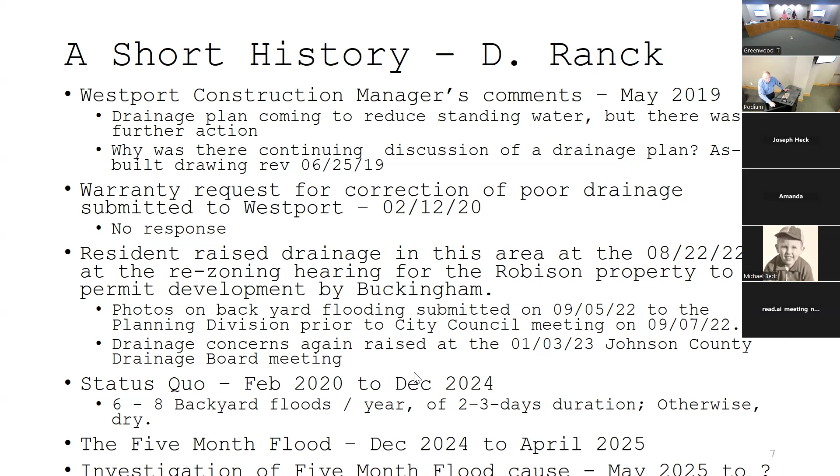The drainage plan - the water we're talking about comes from 2 on-site post basins, 4A and 4C. One of which is the pond - the detention pond releases by 30-inch storm sewers, and runoff drains to the south, then east into the existing grass channel. The existing grass channel is the Robison swale on the Robison property. The other drainage basin was essentially a direct discharge from the residential lots into that grass channel.

The approved plan was to intentionally release stormwater unconstrained from the pond number 4 control structure directly to residential properties, not to a purpose-designed stormwater channel.

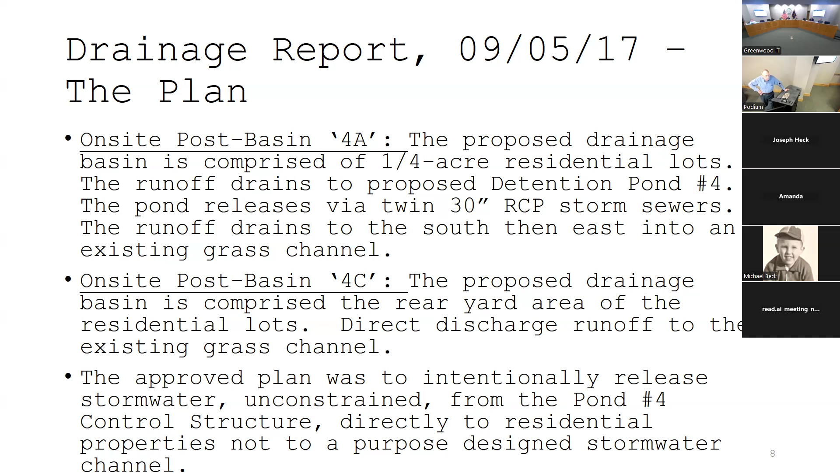Now this is what the plan looked like. We have the 30-inch diameter RCP outlets at the very top of the picture. The red line is where that water goes - it runs across 4 or 5 backyards before it finds its way to the stormwater channel. The green arrows are direct runoff, and it was supposed to go directly to the channel. That was the plan, but this is reality.

Who developed that plan? That plan was developed by Project Plus. It was laid out, and it's their drainage report that this information is taken from.

So I don't mean to interrupt you, but you just said that Joe Heck with Project Plus said he didn't know why it was done that way, even though his company developed the plan. No, he didn't know why we were having these problems when we shouldn't be having them. He said, well, we approved water - like he just said, it should be flowing outward from each house. But he said, I don't know why water is getting stuck at your guys' houses for weeks. And he said he's going to come out there, but every time I go there... okay, I'm going home. So I'm sorry, Dale, I didn't mean to interrupt you. Go ahead. No, that's fine. Trust me, I've done enough NASA design reviews that interruptions are not an issue.

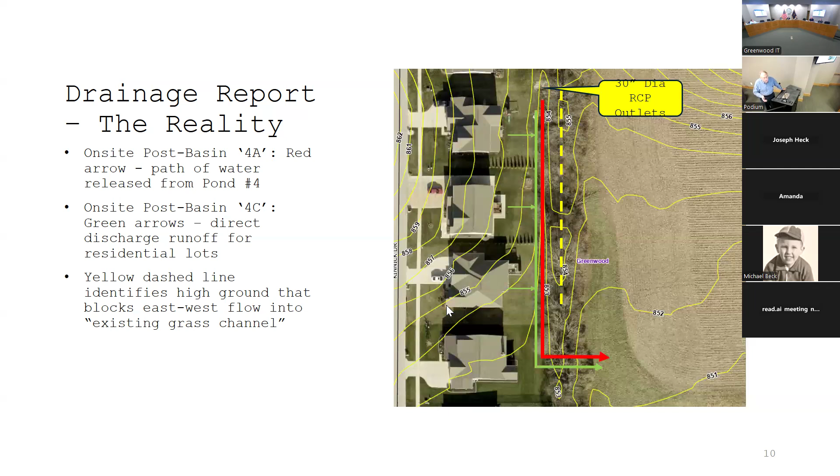Now, the design was the normal pond elevation is 853.7 feet above sea level. There's a 6-inch round orifice in the control structure designed to release any water above that level. Farther up, there's a 24 by 40 inch orifice in the control structure. It releases any water where the pond level is above 854.5 feet - for those of you doing the math, that's 9.6 inches. So you have two stages of water release from that detention pond.

The last one, the 24 by 40, is what causes the conditions that result in a high flow and floods backyards.

Now, this is what low flow looks like. That's kind of the level that you get. That runs from 4 to 7 days after a rainfall between a half and an inch.

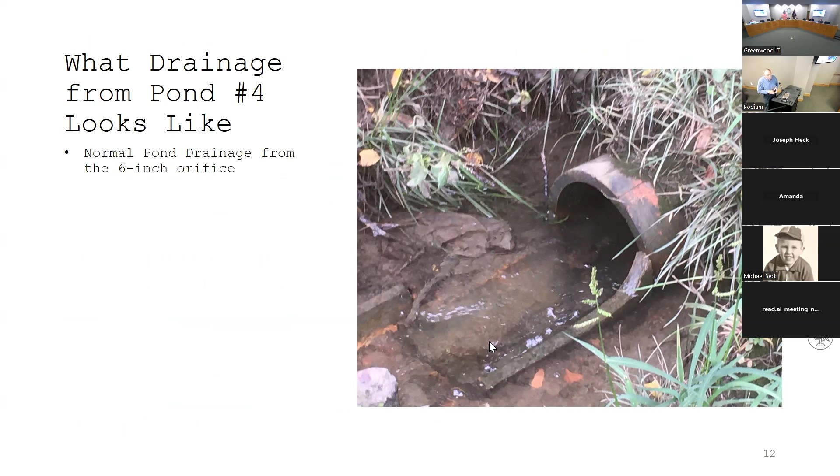This is what high flow looks like. That was taken off of my deck on the back of my house, by the way. And this predates the work that was done to install the pipes and things like that. So the area behind that second deck down there is where the fill and everything is today.

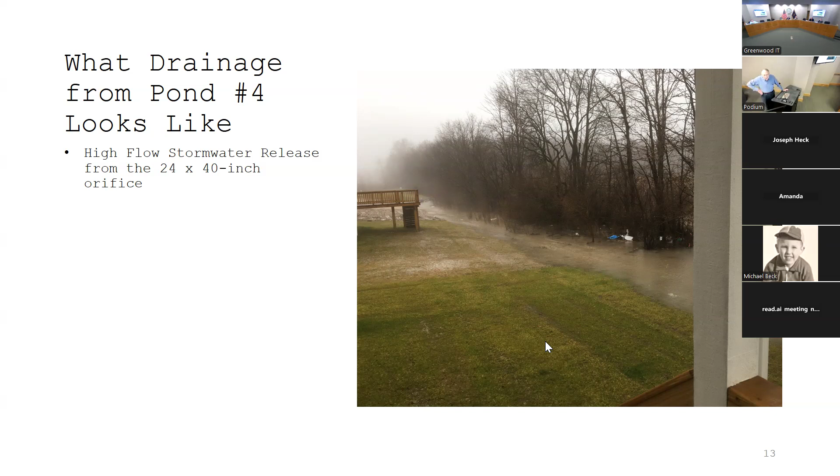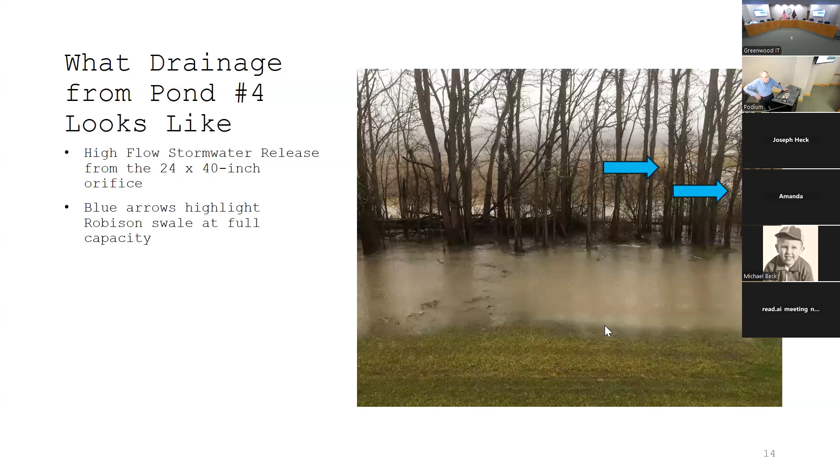This is a second picture of it. That's the high flow stormwater release source. The blue arrows show the drainage swale on the Robison property completely flooded, completely full. That's the magnitude of water we're dealing with. Plus, it also collects water draining from the Robison property as well. So it's kind of a massive amount of water in a big rainstorm. It'll happen.

The flood first appeared in December of 2024. We had a heavy rain, kind of the typical flood. Then it froze and stayed that way well into February. Then it started thawing out, but it didn't drain away as I was expecting, but stayed there until about mid-April.

Now, occasionally having water flowing across my backyard, I didn't really think that was much. As I said, it's not much of a nuisance. This is a nuisance.

And how long is that, Dave? Those low flows -- Greenwood gets between 44 and 45 inches of rain per year on average. On average, it rains 120 days out of the year, so you get measurable precipitation. So basically, we would see something like, on average, 3/4 of an inch of rain a week, which is more than enough to keep that low volume flow going. And it takes 4 to 7 days for that low flow to completely exit and stop from the detention pond. As a result, these residential properties would see a near continuous flow of water across their property. It's hard to call that anything but a nuisance.

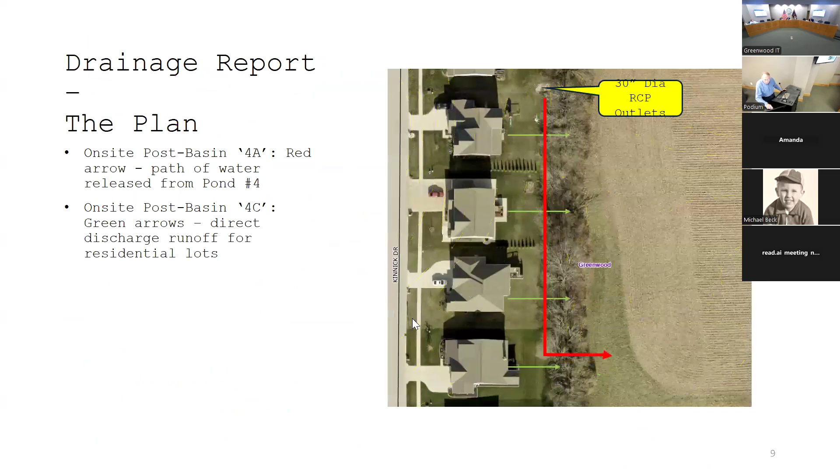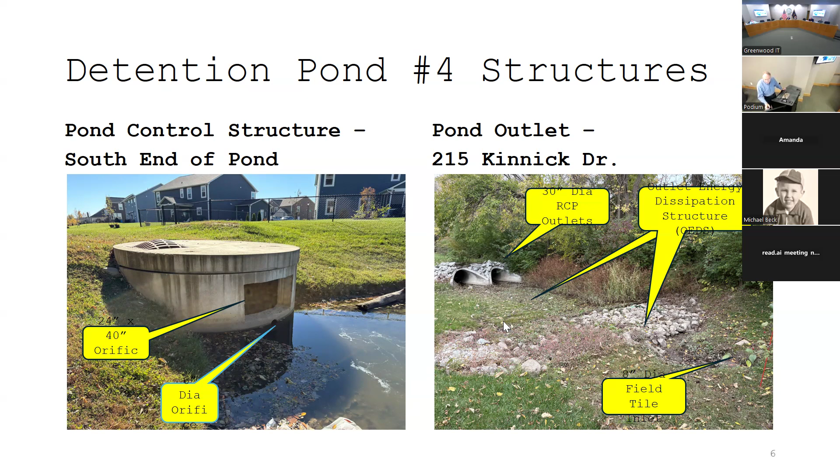And the only reason we don't have that running water is because right now, that water that comes out goes into that tile and ends up over in the Robison drainage swale. If that tile was not there, we would be having running water across those residential lots most of the time.

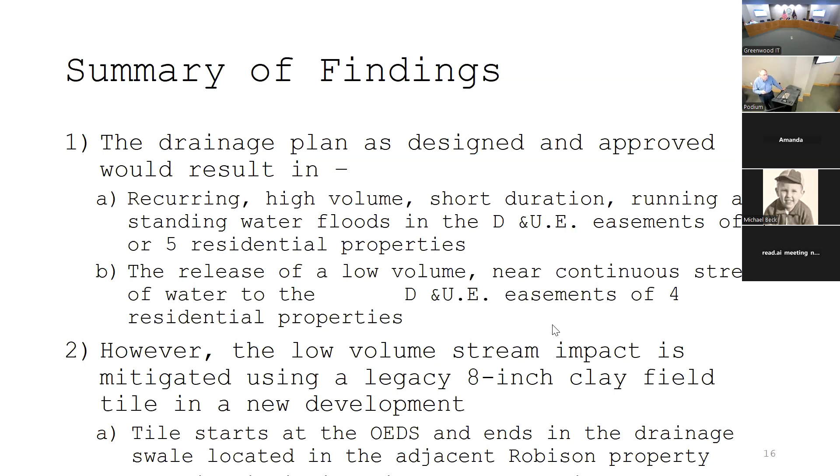There's also an apparent discrepancy in the construction of the #4 Pond control structure that increases the frequency and volume of the high volume floods described in 1A. Now, if you look at the drawings, it shows that the inside diameter of those 30-inch pipes is at the same level as the 6-inch orifice. So the pond would drain down to its normal design level.

However, when they installed the pipes, they installed them so the outside diameter of the RCP is at that level, at the design level for the pond. So what it actually drains down to is 3.5 inches above the design level, because the standard thickness of a 30-inch RCP wall is 3.5 inches. So we actually get more high volume flow releases than the design would suggest.

That actually works to some degree because it would also reduce the amount of time it takes to get down for the low flow, because you're not dumping as much water out. Kind of goes either way. Interestingly, the drainage report calculations were done for a 4-inch rather than a 6-inch orifice.

Installing those pipes in that fashion and increasing the orifice size to 6 inches, both would be what you would do if you wanted to drain the pond faster between rainstorms, which would result in more water running across the lawns.

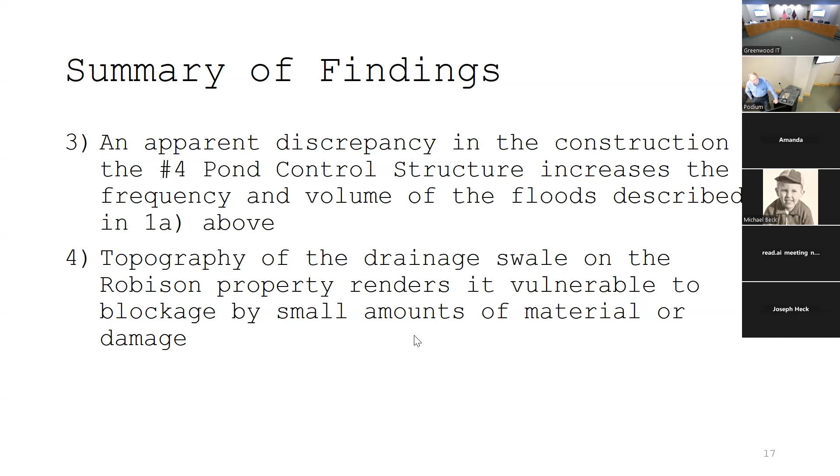So if you want to talk about any of these details in more detail, I have another dozen pages of information here if you want to see any one in particular.

One thing I learned in my 30-year engineering career is that compliance with codes or specifications is necessary, but not sufficient to guarantee a good design. So if somebody starts hiding behind codes or specifications, my experience is that the only thing it accomplishes is pissing people off.

So now we come to the point, what are the next steps? Here are my recommendations. Direction that immediate maintenance be performed on legacy field drainage tile, to maintain or increase drainage capacity.